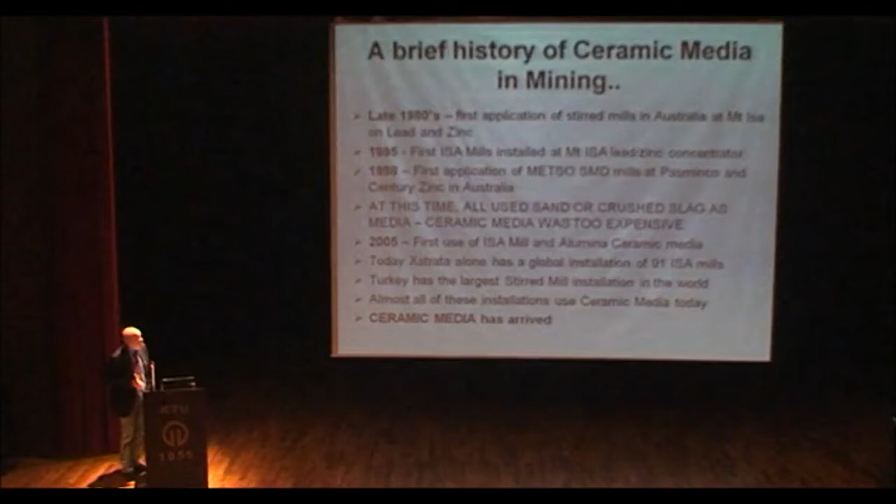And strangely enough, I'm not sure if all of you know, but Turkey is one of the largest stirred mill installations in the world. It's a unique, I'm not going to go any further than that, I think probably you all know, but I won't advertise it for them. But it certainly is a major development.

And all of these mills today, these installations, use ceramic media. And in doing that, we've gone from a situation in the early 2000s, 2002, 2003, where the global demand for ceramic media in general, that's globally into all applications, was around 5,000 tons.

Today, I would say certainly this particular installation in Turkey alone probably uses the equivalent or more than the total global demand a few years ago. And in doing, like everything else, the prices come down. So right now, as I've said at the bottom here, the ceramic media or micromedia has arrived. It's a viable option now.

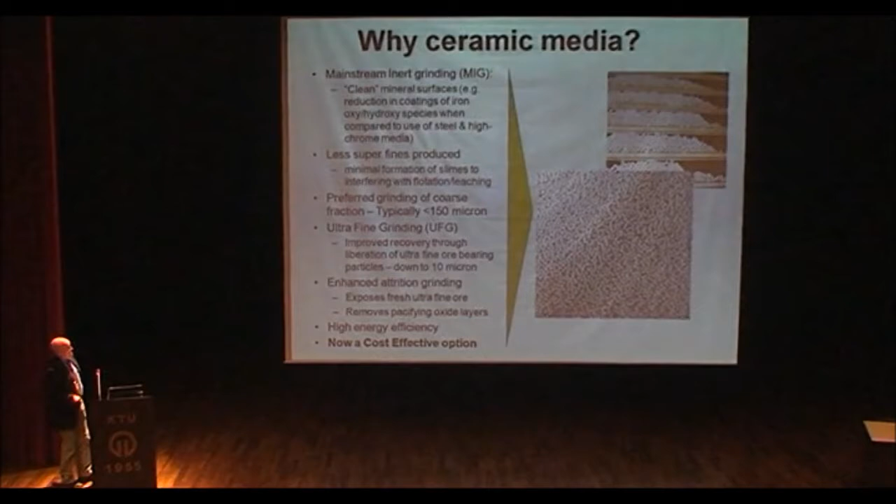Why ceramic media? Well, apart from the fact that with ceramic media, the main thing is if you're milling extremely fine, and I'm talking about going down to 10 microns and ultra-fine grinding, you have far less fines than you would do in a conventional steel milling with large balls, which create a lot of slimes. And again, in hydrometallurgy, slimes are one thing you don't want.

But I think the big one up here is what we call mainstream inert grinding, or MIG. It was developed by the platinum mines in South Africa. And the need for that is the fact that one of the problems when you're milling the steel is that certainly on fresh sulfide faces in an aqueous environment in mills, you end up with a problem where you get a passivation of your sulfide particle from iron oxides, iron hydroxides.

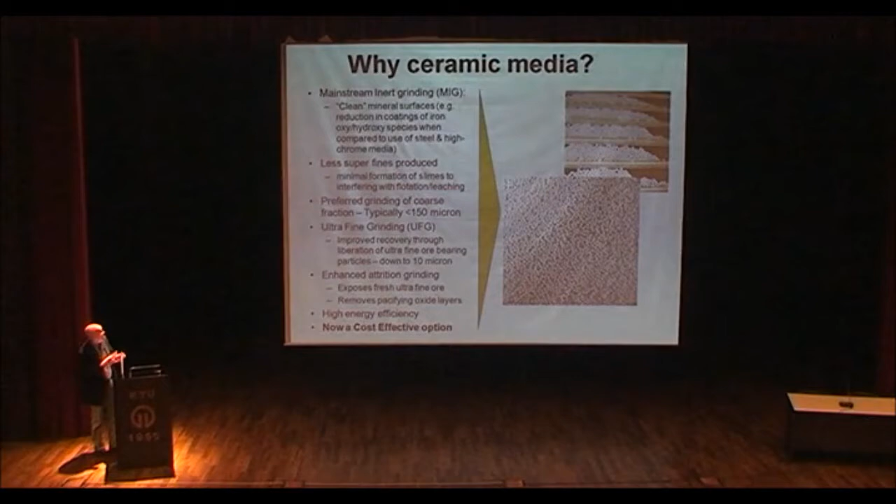To coat the surface, it's a molecular layer, but it's sufficient to absorb the oxygen and also to make it very difficult for flotation, where your flotation reagent relies on adsorption. It's not a chemical reaction, it's actually a charge reaction, but the passivation stops the reagent adhering, so you don't float the very fine particles. They tend to go through into the tails and you lose them.

And on leaching as well, I was looking through the document this morning, and Professor Habashi has mentioned it, that one of the problems in any sort of leaching is the deprivation of the leach liquor of oxygen. And one of the problems there is iron will do that. By producing these oxides or hydroxide states, it's taking oxygen out of the situation.

Ceramic media is inert. If you have a rubber-lined mill or a polyurethane mill with polyurethane discs and ceramic media, you don't have this. So you have what we call mainstream inert grinding. The platinum industry uses that to great effect. They've had a 4% increase in their recoveries just purely from inert grinding.

If you work out what the platinum is worth these days, it's something like $1,700 an ounce. You multiply that by the amount they produce, it's a very significant value. In fact, they could pay off their entire installation of 22 mills just merely by having the benefit of inert grinding.

The other, of course, is ultrafine grinding, which is everybody wants to get down to that last little sulfide particle. And we're talking, as I say, we can get down to 10 microns quite successfully in a very large mill. ISA mills produce a 10 cubic meter unit. It's 1.8 meters in diameter. It can have up to 18 tons of 5 millimeter balls in it, or 3 millimeter balls.

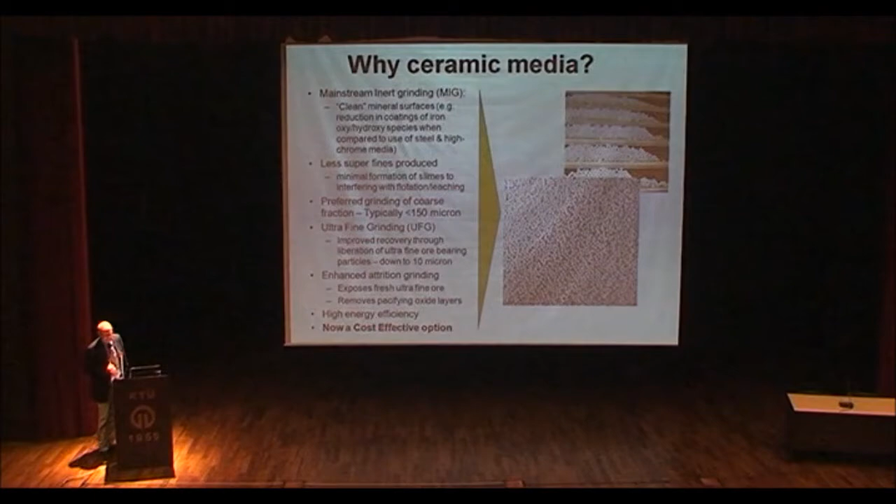They'll tell you, oh, but mine has got so much zircon or zirconium silicate. I put other things in it. It's got magnesium in it, all sorts of it. It has some effect, the composition. The zircon, zirconia, generally is used with alumina to gain density, nothing much else.

It depends on how you make that particular bead, what you do to it in processing, the size of the raw materials going in, the firing, to get a bead, a proper bead. So don't be fooled by somebody telling you that it's better than the other guy because it's got more zirconia in it. That's not the case.

Sizes, we produce a range, in mass range, from 0.2 millimeter right through to 5 millimeter. The conventional sizes at the moment are 2 millimeters, 3.5 and 5 millimeter sizes, but you can have smaller ones. The density, invariably you have three densities. You have the alumina species, which are all around about 3.8. You have the zirconium silicate, which is made from pure zirconium silicate, at around about 4.2, 4.3.

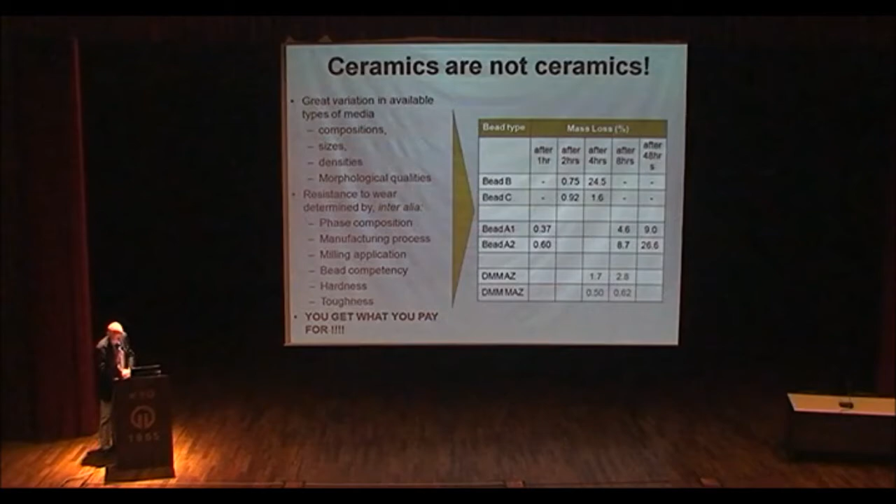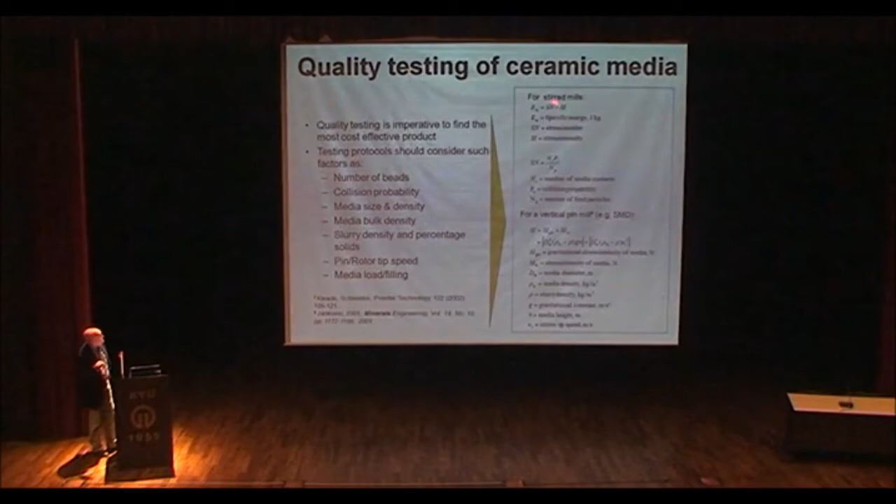Okay, so we come to that. I've mentioned you need to look at these; you've got to test. And if you talk to all of the guys at the Julius Kruttschnitt Mineral Research Centre in Australia who work with ISA, and you talk to all the guys in the universities, they've got all these fantastic formulae and things to look at and to study. The bottom line is, all of these can have an effect on it.

The number of beads, that's really the bulk density. Collision probabilities, the amount of contact points because of the size of the bead. Bulk density of the beads, slurry densities and percentage solids, the tip speeds, media, the load filling, what sort of load you put in your mill. You can put in an 80% charge, you can put in a 50% charge. Sometimes 50% will give you better milling, better performance, lower energy than 80%. So these you have to take into consideration.

So in the end, it's no good doing it in a little 4-liter test mill in the lab. Ultimately, if you want to see if this thing works, you need to put it into the system. Put it online, take a mill out or get a large mill. All of these stirred mill suppliers provide large lab mills now. They produce 1 cubic meter or half cubic meter units. Test it on there. That's where you're going to find out what works.

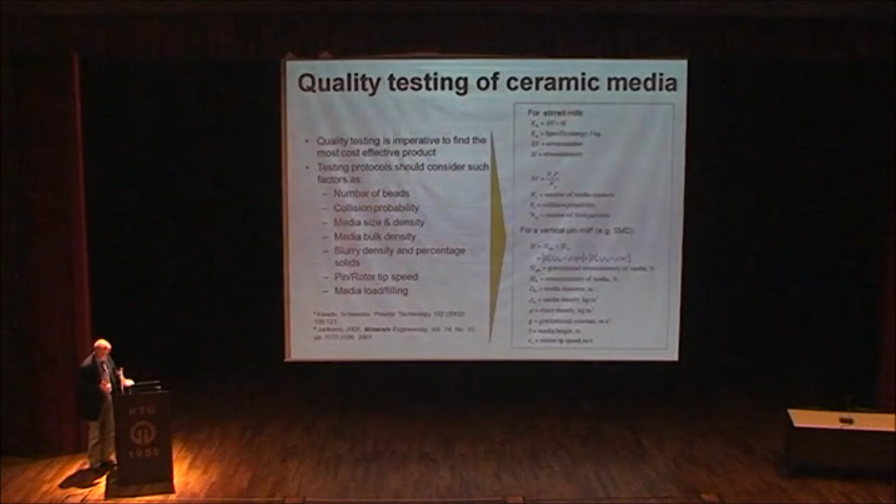Okay, so this is just really a summation on this, but it really is critical. This is not like conventional milling with steel media. You spend a long time looking at a stirred mill. Stirred mills are not cheap. They're very, very expensive, particularly units like the big ISA mills made in Germany by Netzsch. That in itself means you're getting the Rolls, well, not the Rolls Royce, in that case you're getting the Maybach or the Mercedes of mills. But believe me, you're going to pay for that mill. It's a wonderful mill, they're tremendous. All of these units, they're good.

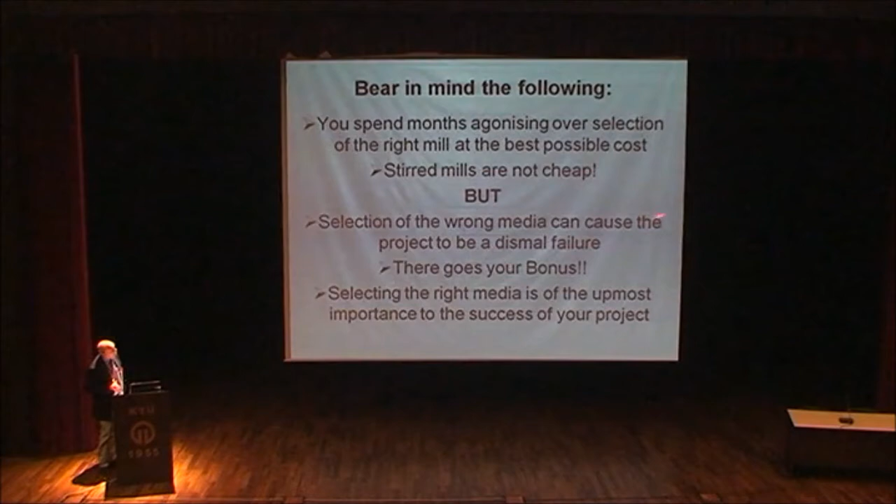But the problem is if you select the wrong media, your project's going to fail. The boss is going to look around and say, well look, you've spent all that money, and what's happening? We're not getting any of the performance because your media was wrong. That was it. And that's it, guys. There goes your bonus and your promotion. You must get the right media. In ceramic media, one ball is not the same as the next ball. It's very, very critical. So don't think just because you've got a fantastic mill, you're going to get the solution. You must do that.

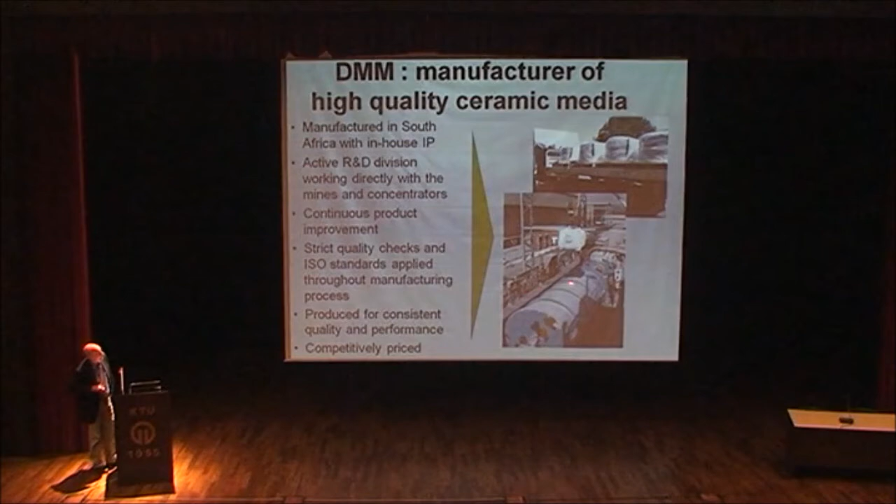That is an IsaMill there, you can see it. It's a horizontal unit. It has a 3 megawatt motor on there, and they run about 12 tons of media inside it, and they have a consumption of about 12 tons of media a month.